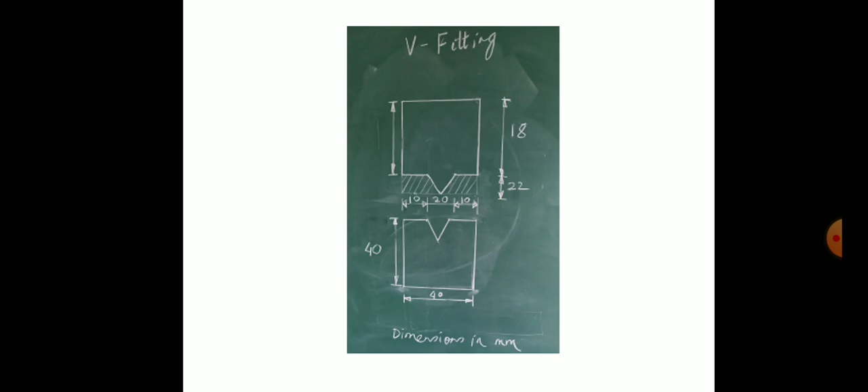First, let us see the dimensions required for the V-fitting. These are the final dimensions, and this is the shape you have to make. Dimensions are 40 by 40 mm for length and breadth. The dimensions for the V are 22 mm in length and 20 mm in breadth, and for the lower part, again 22 mm in length and 20 mm in breadth.

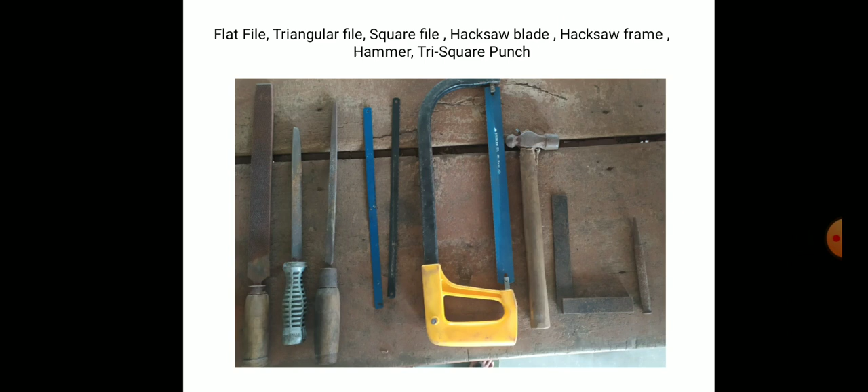Tools required for this are bench vise, flat file, triangular file, square file, hacksaw blade, hacksaw frame, hammer, tri-square and punch, angle plate, and vernier height gauge for marking purpose. Initially you will be given two metal workpieces.

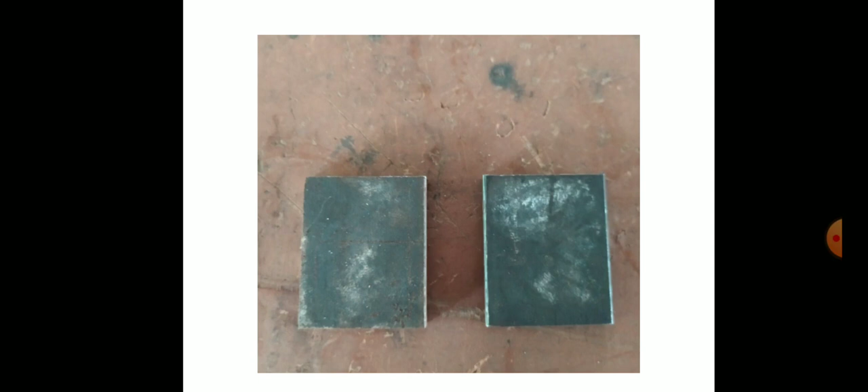The dimensions of these two metal pieces would be more than what is exactly required. So probably it will be around 42 by 42 mm or 44 by 42 mm. You need to file these pieces on both sides till you get the final dimension of 40 by 40.

Now hold the workpiece with the help of bench vise and file on one of the edges. File it in such a way that it becomes flat.

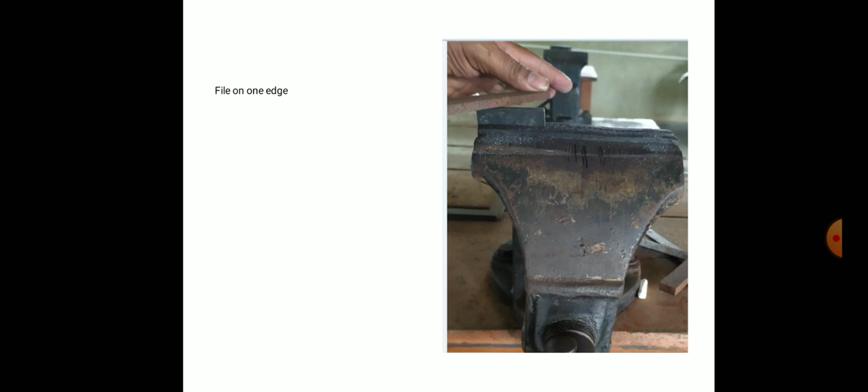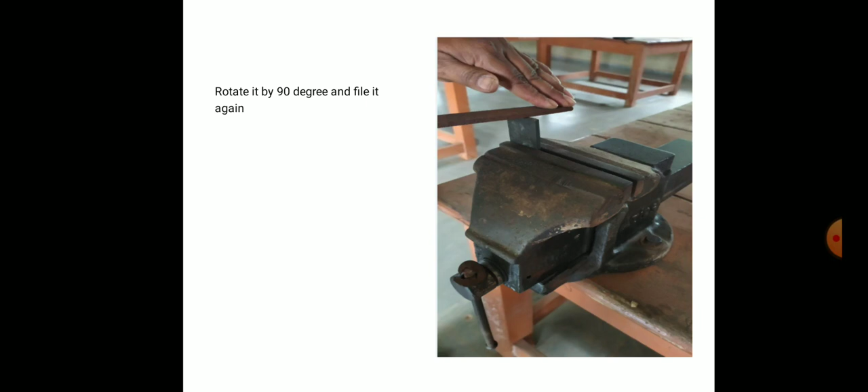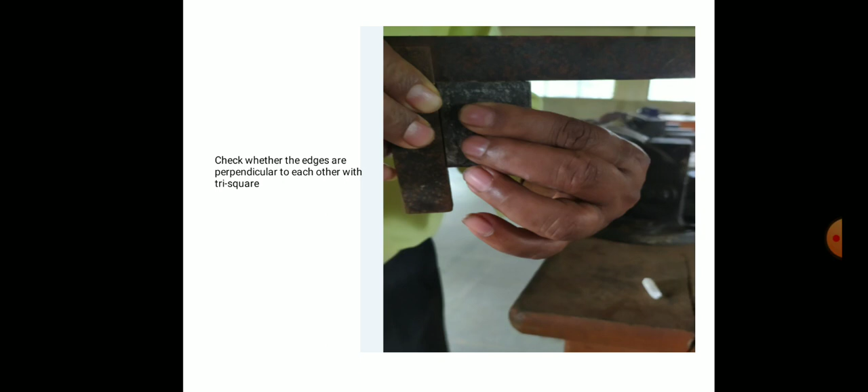After that, rotate it and file on the other side. File in such a way that both edges are flat completely and perpendicular to each other. With the help of this device called tri-square, check whether both edges are perpendicular to each other.

After that, apply chalk paste on the workpieces. After applying the chalk paste, now you have to do the marking.

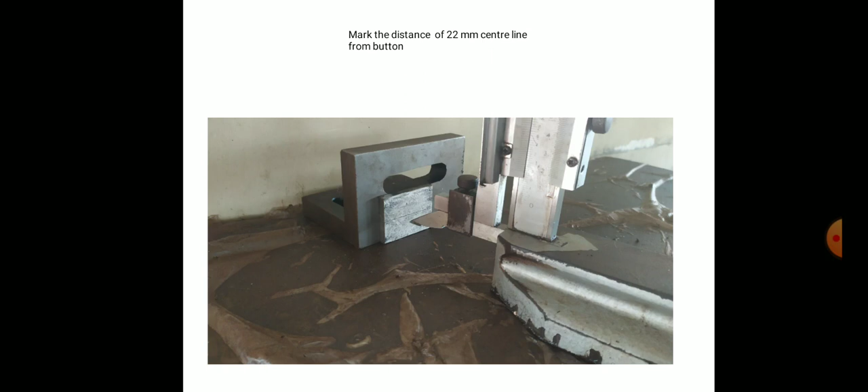Now it's 20 mm, not 22 mm, please note it. So from the bottom, at a distance of 20 mm, mark it. After marking 20 mm, mark 10 mm from the bottom.

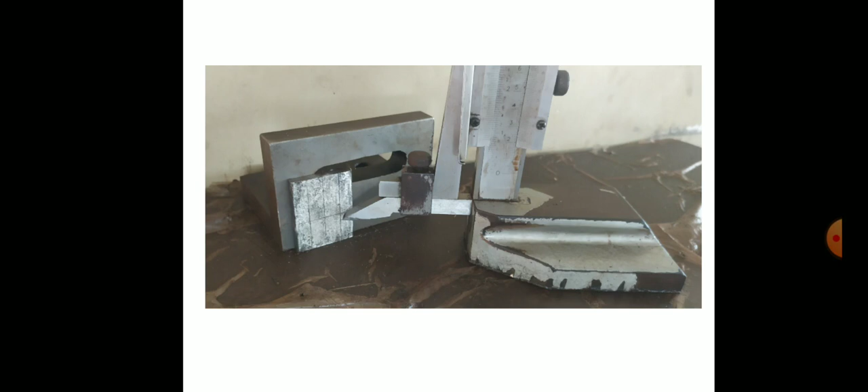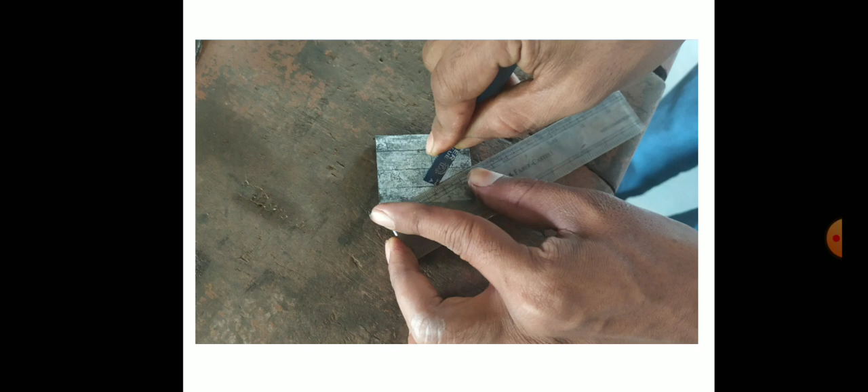So these markings are done for the upper part. Now with the help of a scale and a blade, a reference V mark is drawn. See, this is how it is being done. Similarly on the other side it is done like this.

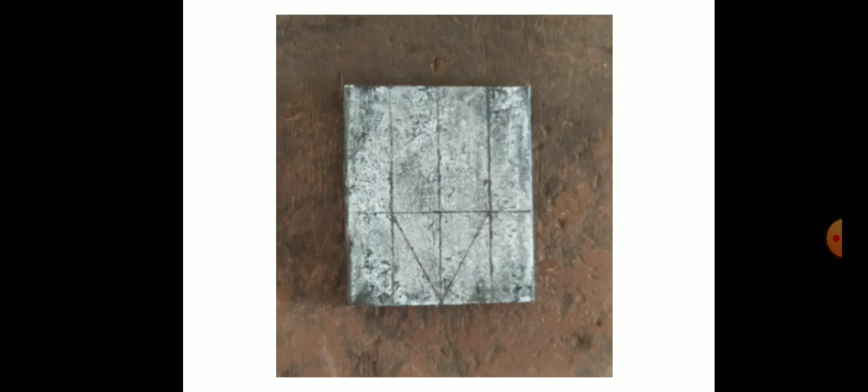After this you have to do the punching on this anvil. Do punching properly exactly on the lines which are already drawn with the help of the blade. This is how the punching is being done.

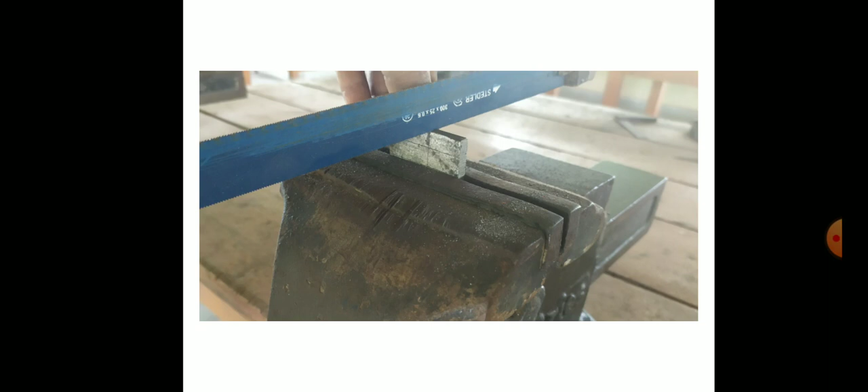Next, hold the workpiece on the bench vise and cut with the help of a hacksaw blade. This hacksaw blade is held in a frame. Make sure that while cutting you keep some allowance.

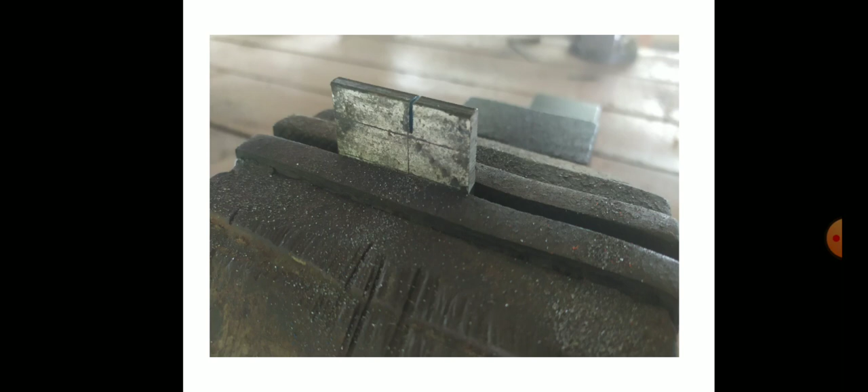See how it is being done. Keep some 0.5 to 1 mm allowance and then cut it. This is being done, and similarly on the other side you have to do it. Now after this, on both sides it is being done.

Now on the V part we have to cut it. See how this person is holding it now. Wherever dots are visible, keep just 0.5 mm allowance and cut the metal from outside.

This is how it is being done now. Similarly on the other side you have to do it. So we can see it is being done here too.

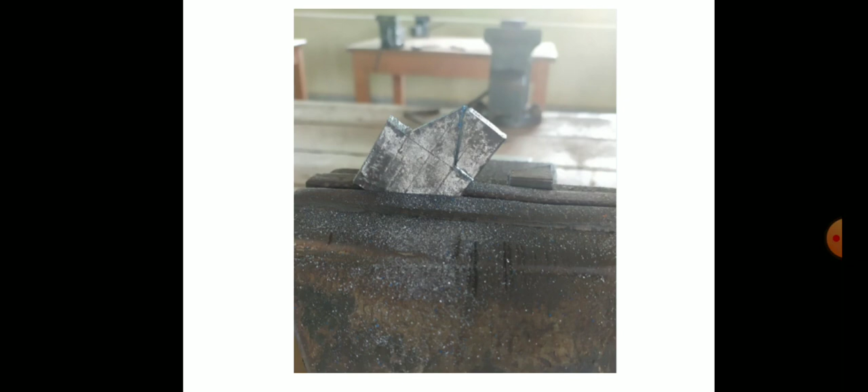Finally when the material is being cut, you have to file it with the help of a square file. File it properly so that a proper finish and the required dimensions are obtained. That's why you have to keep some allowance of 0.5 to 1 mm.

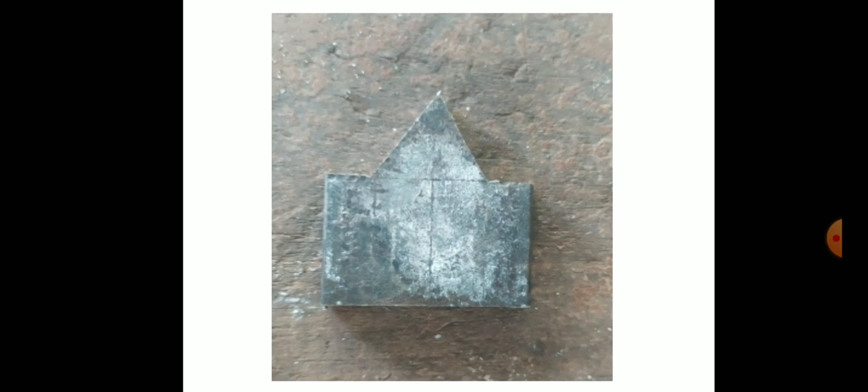This is the final workpiece done after filing on both sides. If you feel that it has not been filed properly, again you can keep it in a bench vise and file till the required dimensions are achieved.

Now for the lower part, we will do it similarly as was done for the male part. Now from the bottom, mark 20 mm.

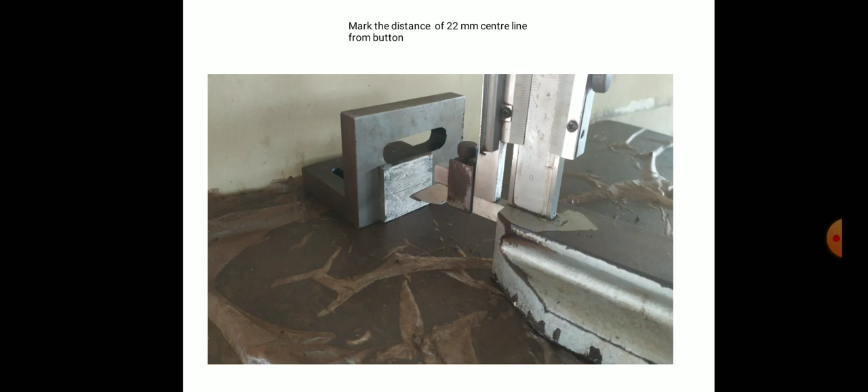Please note it's not 22, it's 20 mm, from the bottom mark 20 mm. After that, from the bottom, take a distance of 10 mm and mark it.

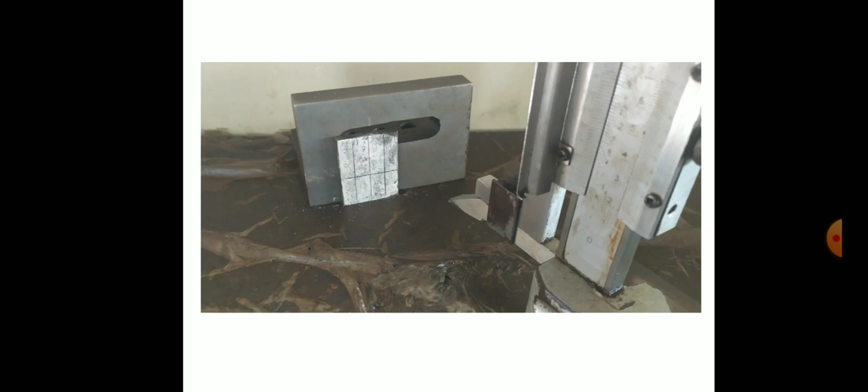Now rotate the workpiece by 180 degrees and similarly mark 10 mm on the other side. After that, mark 22 mm from the bottom.

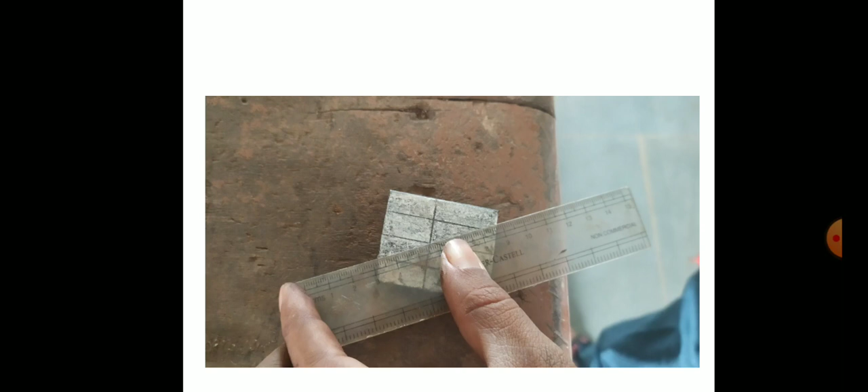Now draw the V here, and draw the V here again.

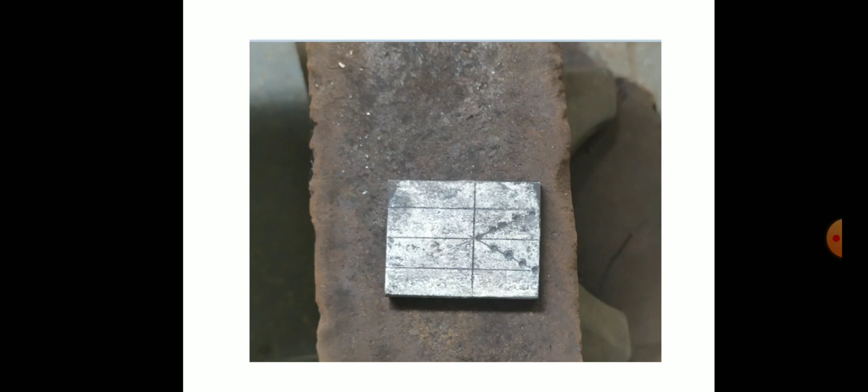After that, do the punching for this. This is how the punching is being done. So this is what you are doing for the internal section, the internal side.

Next, hold the workpiece on the vice. See how it is being held. You have to cut the metal from inside, making sure you keep an allowance of 0.5 to 1 mm.

Now cut it. Similarly do it on the other side. Now we can see, just check the previous slide what has been done.

Now both sides have been cut, and after cutting when the material is removed, make sure you file it properly with the help of a triangular file, as well as a square file. File it in such a way that a finish is achieved, up to the particular dimension.

Once the filing is done, check whether both the upper part and lower part are getting fixed with each other. If not, file it as per the required dimension till the proper fit is achieved. So this is the final fit that is achieved.